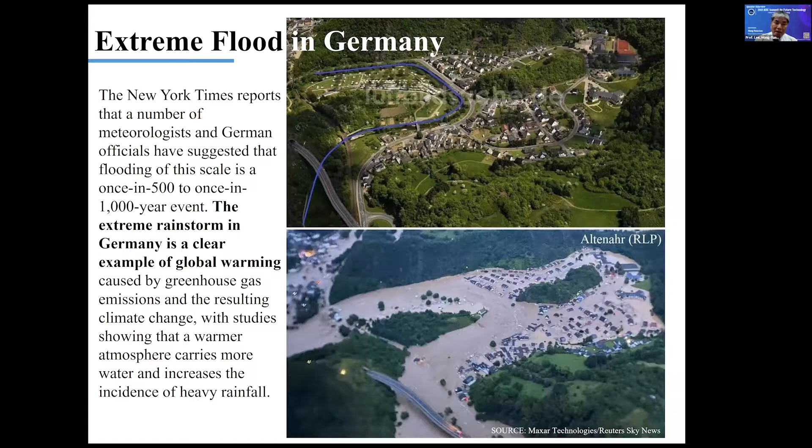Just last week or two, we had extreme flooding in Europe, what we call a 1,000-year event. And this is Germany. And this is China, a 2,000-year event. So extreme weather conditions have become normal.

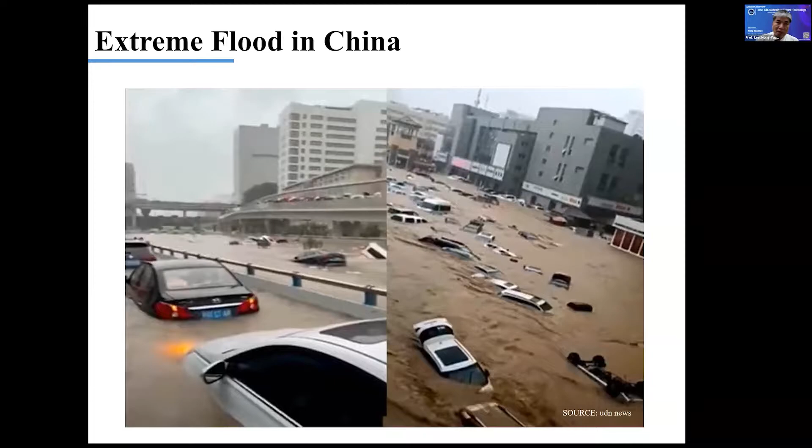What should we do? In Taiwan, we're supposed to have 4.5 typhoons every year, but last year we had none. So we had a very severe drought problem just two months ago, then after one week, a very severe flood problem. This is the situation we now face.

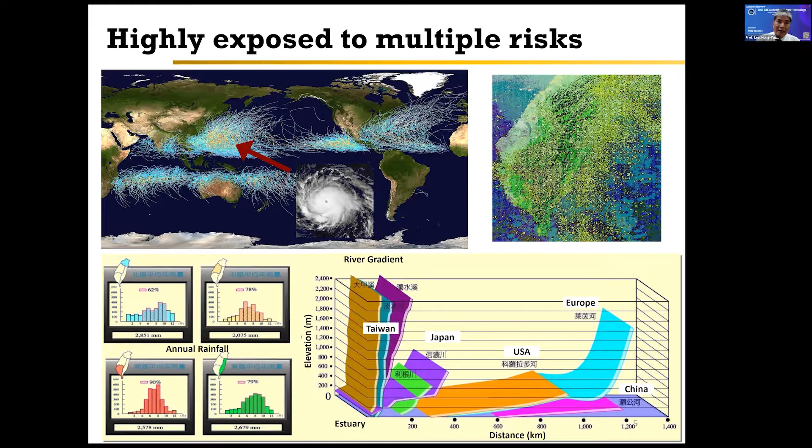According to our analysis, in the past every 19 years we'd have a severe flood; now it's every 7 years. In the past, every 17 years we'd have a severe drought; now every 9 years. So it's either flood or drought, nothing in between.

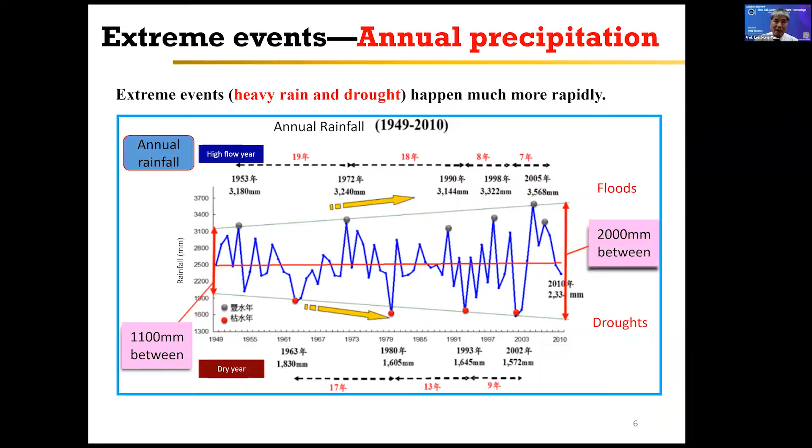In the past, we believed human beings could conquer nature, so we established a very big system called the Taipei Flood Defense System. It was finished during my term as Commissioner of the Water Resource Agency in 1997. We protect the whole of Taipei with a very high dike, hundreds of pumping stations, and hundreds of water gates.

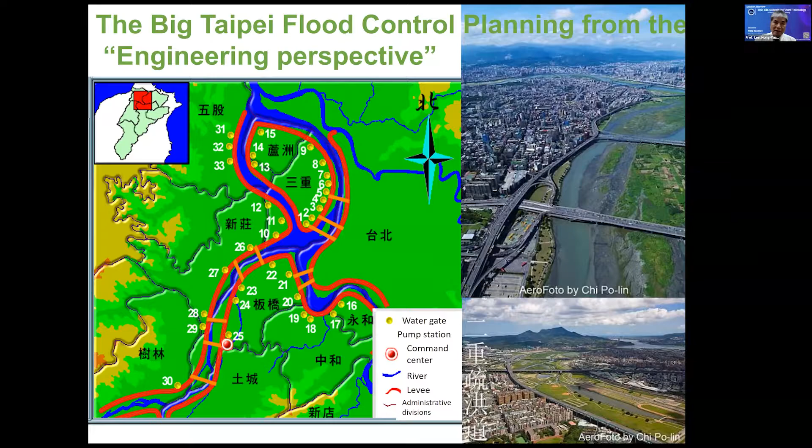And we have the most accurate warning system. In the Tamsui River, six hours ahead, we know exactly the water level, speed, velocity, and discharge. We use this big data to control the whole flood management system.

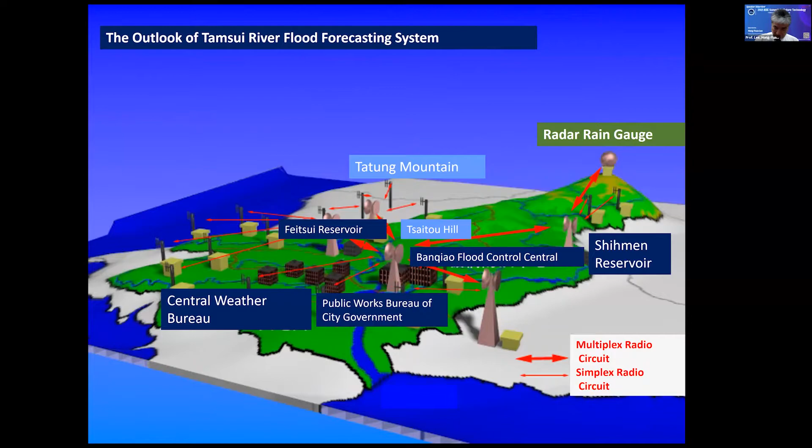But we spent about 300 billion NT, almost 10 billion US dollars — a lot of money back in 1997. Still, I cannot guarantee Taipei won't flood. If we have a 2,000-year flood event, Taipei will still get flooded.

But you cannot say that engineers 40 years ago were wrong. 40 years ago, we believed we could conquer nature, and we could never have dreamed there would be rainfall over 2,000 millimeters.

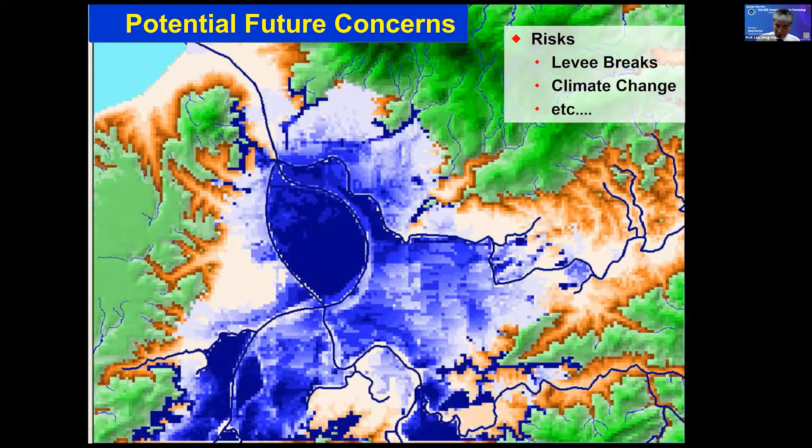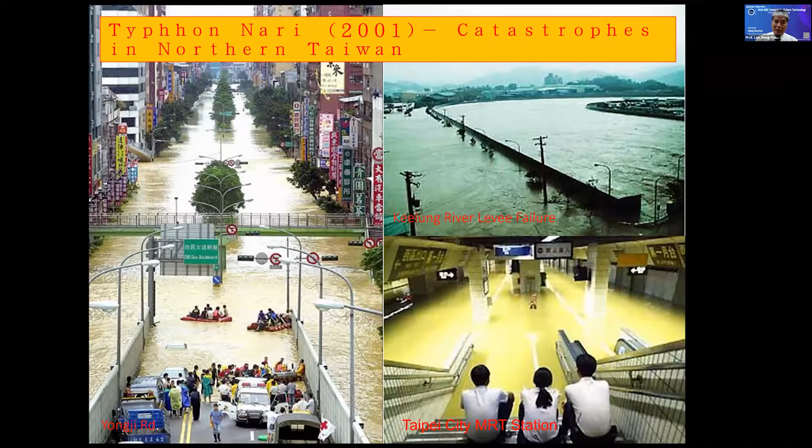So what if I were Minister at that time? I would use urban design measures to solve the flood problem. Taipei got flooded in 2001, but I cannot guarantee this situation won't happen again, because we've spent a lot of money trying to keep the flood away. I'm trying to say we're using land use planning to solve the flood problem.

Actually, we're talking about a paradigm shift. Land reform essentially builds upon the changing of traditional living patterns and values. We have changed our living pattern, redesigned our city, and we now have different values for our lives.

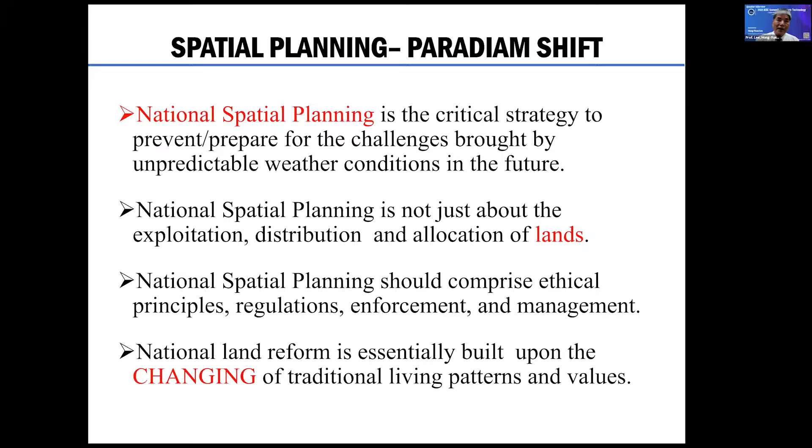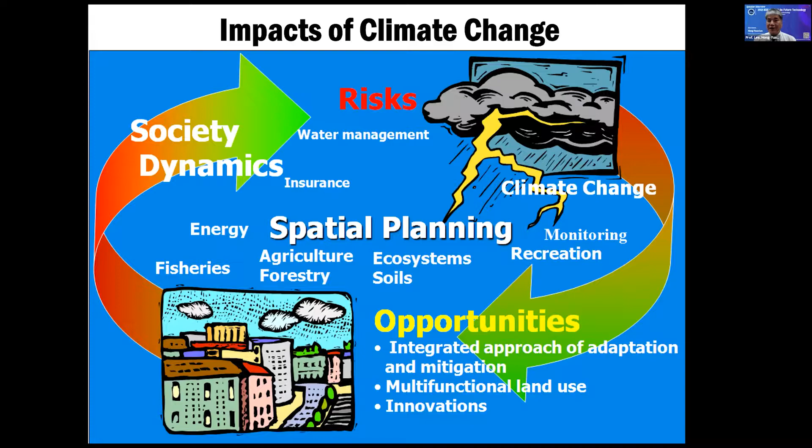So we talk about spatial planning — energy, fishery, agriculture, ecosystem, everything. We have risk in water management, and we actually need insurance. It's the largest crisis for human beings, but also somehow the largest opportunity. This opportunity requires an integrated approach for adaptation and mitigation, multifunctional land use, and most importantly, innovation.

So we are now trying to think, what's the right population for Taipei? In 1945, only 1 million people lived in Taipei, but now almost 8 million people live there. If you have 8 million people in such a crowded area, can you really believe engineers can solve the flood problem or the drought problem naturally? It's not possible.

So we are now very seriously considering reallocating our capital from Taipei to Taichung. By doing that, 3 million people would leave Taipei, and hopefully our people and industry would be more evenly distributed across our land. We are working on that now.

Actually, to do that, we have to calculate the carrying capacity of our land, based on environmental limits, land resource availability, water resource availability, public resource availability, and we have to predict our population and demand. We are now working on it.

That means we want smart use of our land. When I used to be Minister of the Interior, we established a huge cloud system — all the data related to spatial planning is now on our website. You are welcome to visit it.

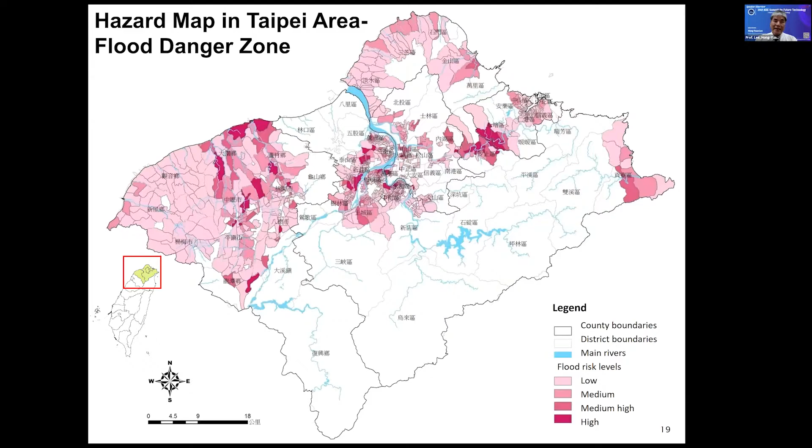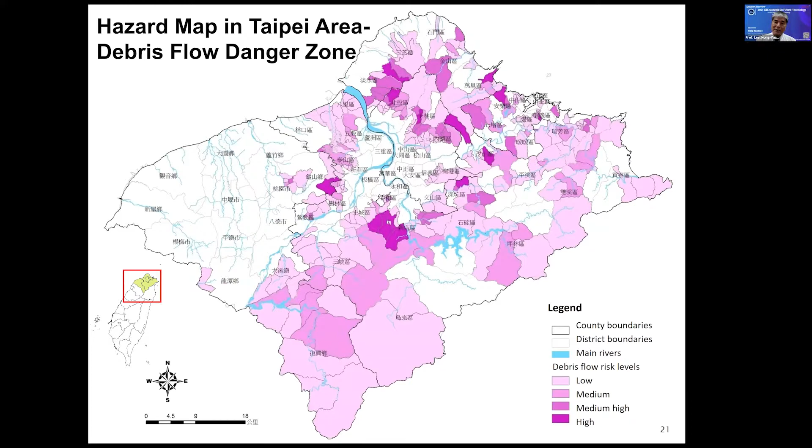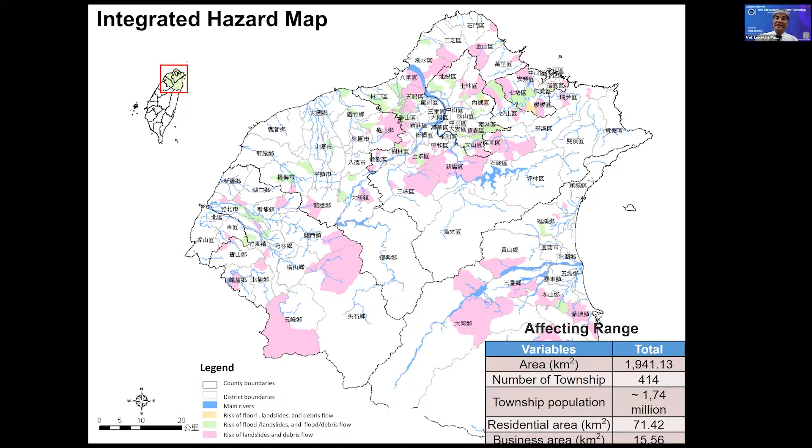This map was done in 2013. We forwarded the map to the local city and county governments and asked them to redesign the city and the county. So in the future, land use in Taiwan is based on the different risk levels of disaster.

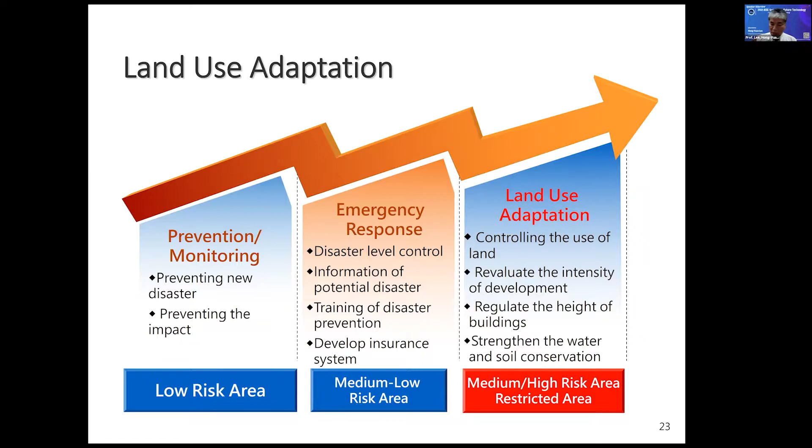For the low risk area, we work on prevention and monitoring. In the medium-low risk area, it's about emergency response, making sure no matter what happens, you are safe. In the high risk area, we try to change the land use and reallocate the people and infrastructure. We want to solve the city flood problem using a non-engineering way.

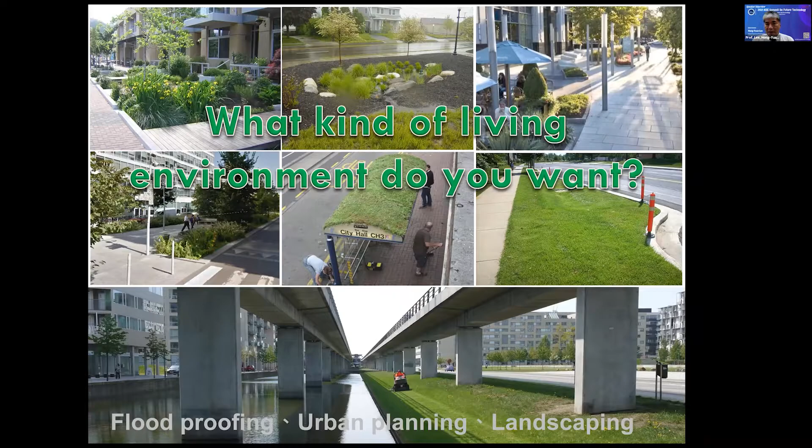So what kind of living environment do we want? Flood-proofing, urban planning, and landscaping all have to work together.

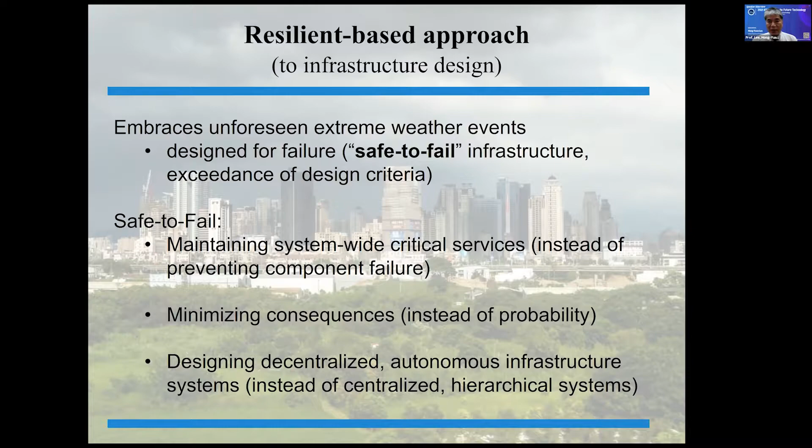We are talking about the resilience approach, which is very different from our traditional way of thinking. There's a good terminology: design for failure. From cases in Europe and China, we can guarantee there's no such thing as safe design, especially under extreme weather conditions. So we have to redesign the city and the town so that when it's over the protection criteria, the major function of the city still keeps working.

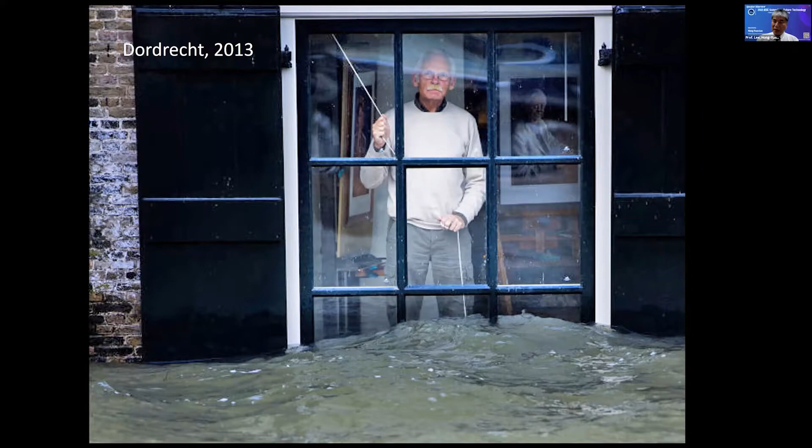This case is a city called Dordrecht in Rotterdam, in the Netherlands. You can see the water is over the window, and this gentleman doesn't have to be relocated, because we call it design for failure. We want to enhance the resilience of the city.

A lot of people, especially the IT and AI people, say we have a very smart city. But what if you get flooded? It's not smart at all. In the case of Zhengzhou, China, the Chinese used to be so proud that they don't have to use cash, everybody runs everything by mobile. But if the city gets flooded, those smart things won't work anymore.

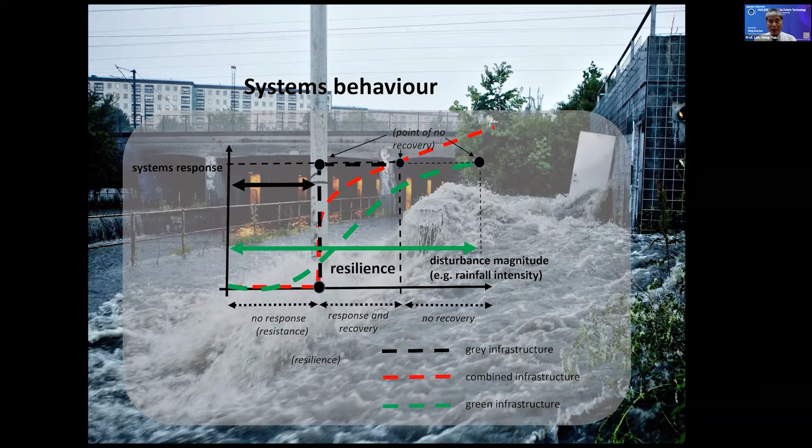So we say we try to increase the resilience of the city. It's a system behavior, not just one function, not just grey infrastructure. We are talking about needing green infrastructure too. From blue and green infrastructure, we actually increase the ability to serve and protect against flood.

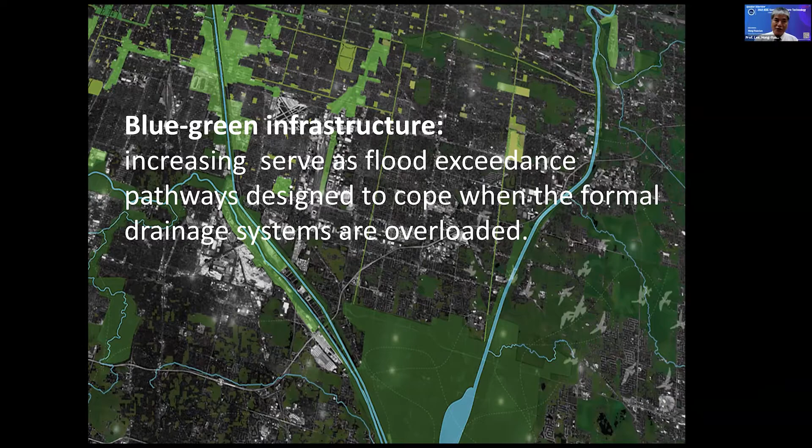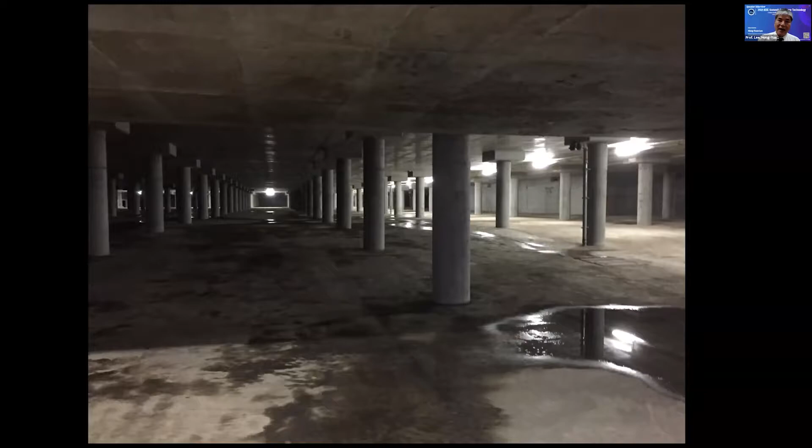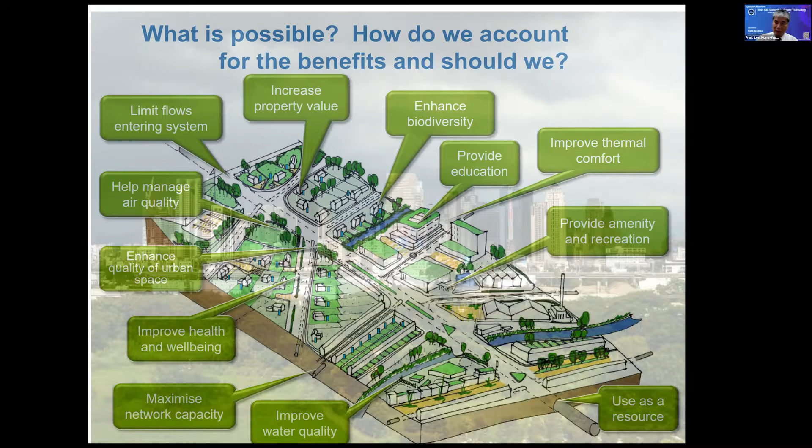The whole city has different functions which we have to redesign. There are so many disciplines involved. We improve water quality, maximize network capacity, improve health and wellbeing, and enhance the quality of urban space. We have to work together as a team from different government agencies and different disciplines.

So from little rain to design rain to extreme rain, we have different concepts, different methodology, different measures to try to improve the resilience of the city.

In the past, the land was not developed, so when we built a city, the water was supposed to penetrate into the ground. Now it becomes runoff. When I used to be the Minister of the Interior, I changed the law. The developer can develop the land from left-hand side to right-hand side, yes, they can do that, but they have to make sure not a single drop of water more can be released from the project.

We call it low impact development. You cannot stop development, but you make sure when you develop, the impact is limited, according to the law. There are so many different facilities in this local low impact development, and those elements have to combine with the landscape and the design of the city.

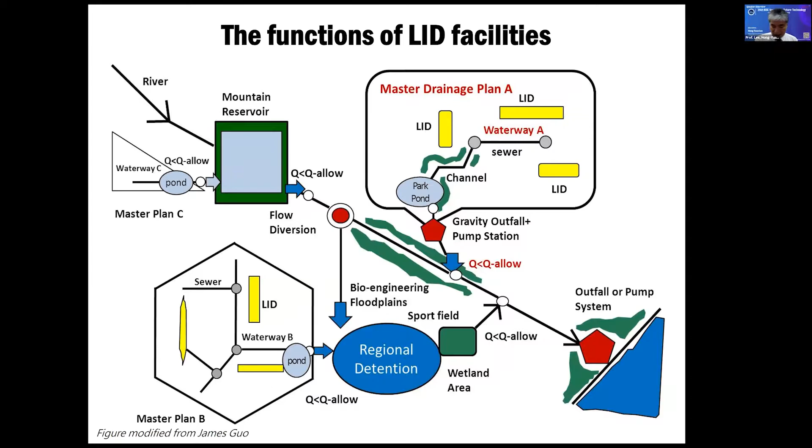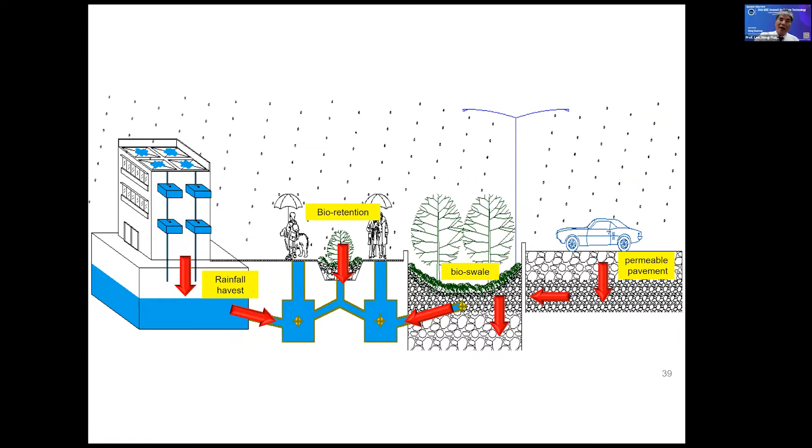Two of my students' PhD theses and five master's theses looked at how to design a city. In China, they call it the Sponge City, where water can penetrate underground and connect to the existing drainage systems.

In the past, as the city became bigger and bigger, the government was busy building the drainage system, which became bigger and bigger. But the flood problem can never be solved that way.

My idea is that the small part is actually a low-lying park, constructed wetland, detention basin, and from the small system to the medium system to the larger system, using urban design measures to solve the flood problem.

It's very easy to say, very difficult to implement, because in the central government, 3 ministries are involved. In the city government, 5 departments are involved. In the university, 3 disciplines are involved.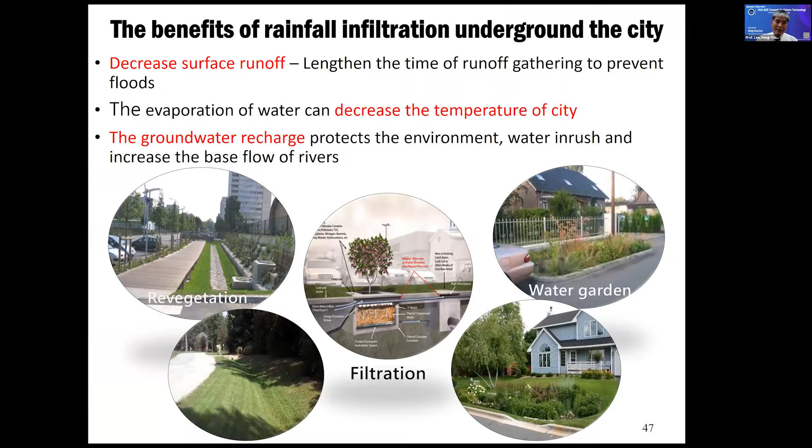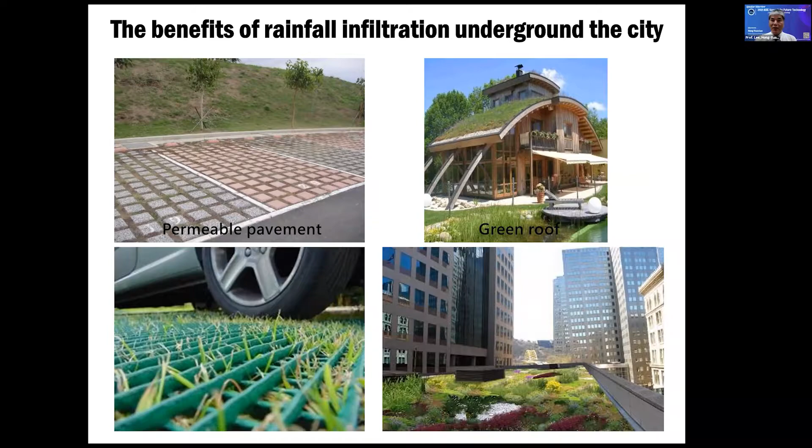And the future of the city will look like that. It's probably very common in the United States and Europe, but not that common in Asia. So we make the city become beautiful. We make sure all the water is permeable and can enter the underground. We have a green roof and all kinds of facilities, and hopefully we can solve the flood problem.

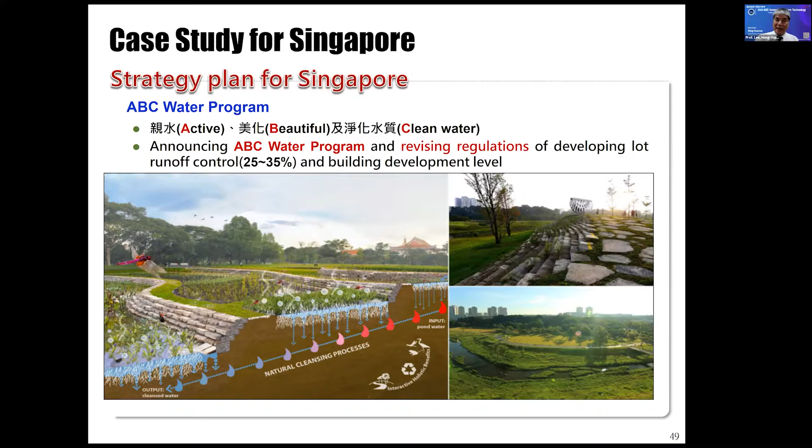Actually, Singapore has a strategic planning approach that turned out very successful. And Stockholm, we call it the green capital of Europe. So when we talk about low impact development, we're talking about storm management, water resources management, and creating environment. Most politicians want to know that by doing this, we solve the flood problem, improve the living environment, and also increase the price of the land.

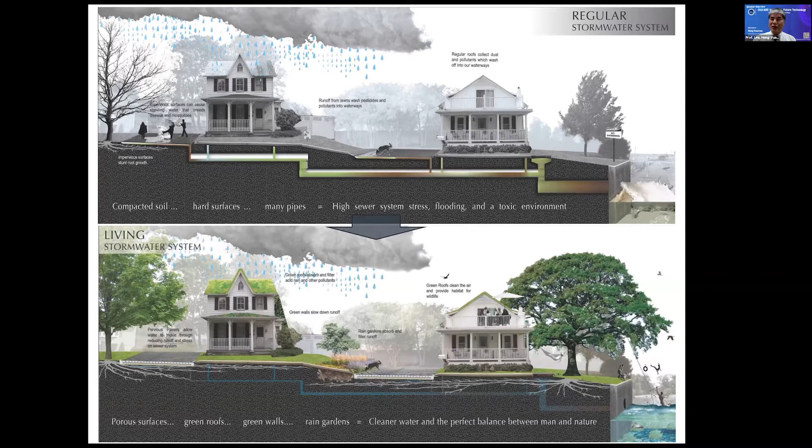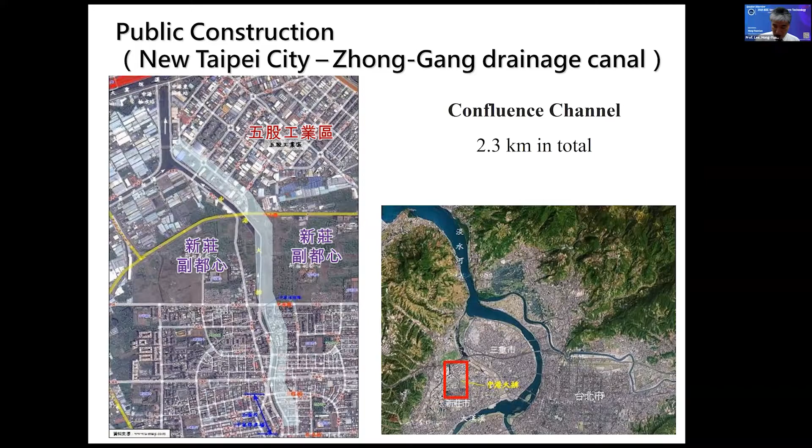We have several cases in Taiwan from when I used to be the vice mayor of New Taipei City. This case is a very polluted canal in the township called Xinzhuang, a city of about 500,000 people. All the sewage came to this canal. It became so polluted, the smell was so bad, and it got flooded very easily.

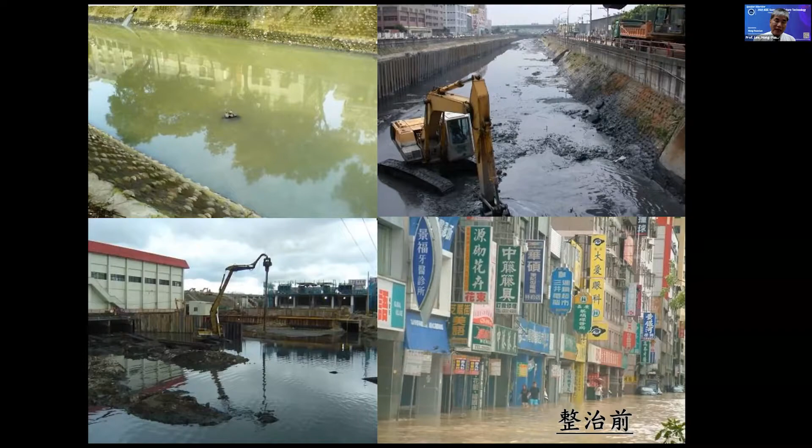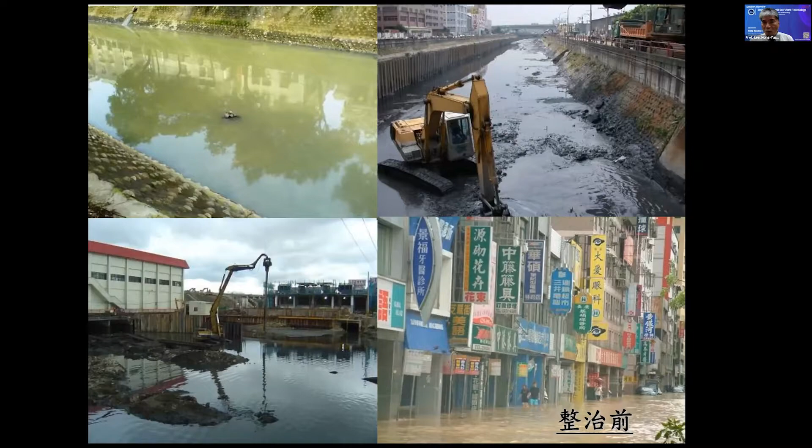So when I became vice mayor, on the very first day I asked 5 director generals to come to my office - from transportation, water resources, environmental, urban planning, and economic development. I told them this polluted water has to become clean water, a clean canal, within 4 years. Why 4 years? Because the term of the mayor in Taiwan is 4 years. We have to make sure that when the mayor finishes the term, the project is there.

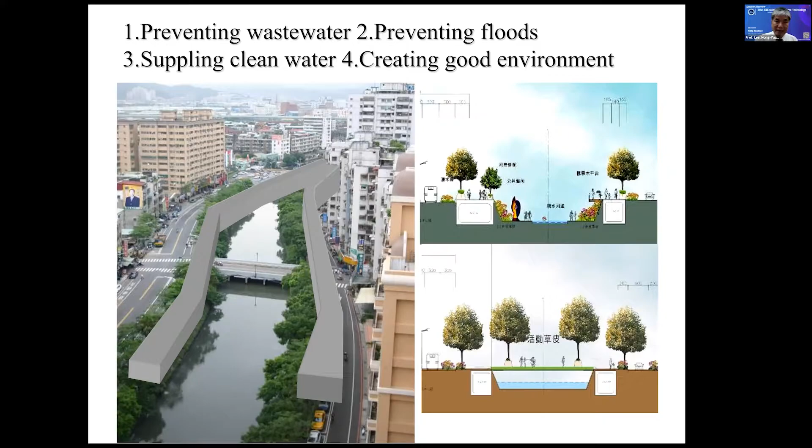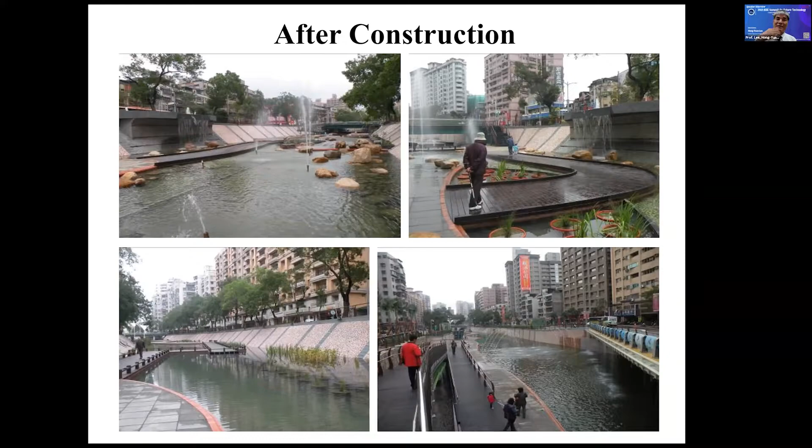Actually, it's quite simple. We just built a box cover to intercept the sewage and transfer it into a concentrated wastewater treatment plant nearby, treat it, and put it back. So it's as simple as that. It used to look like this, now it looks like this. Water is clean - actually that water is recycled water. You don't have to spend a lot of money, and it's done like that.

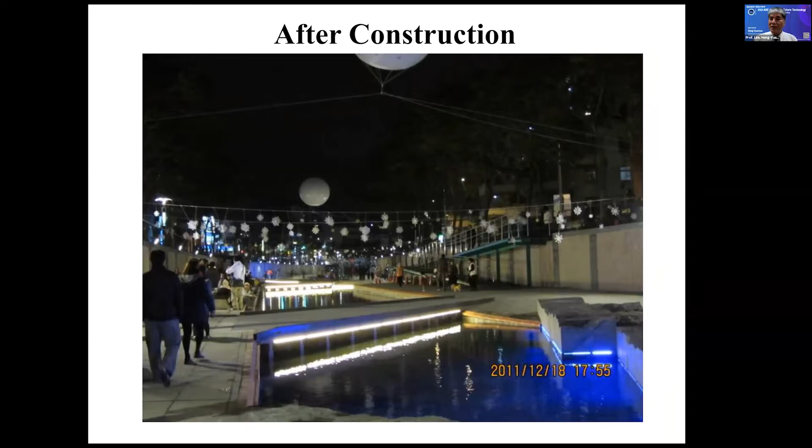We spent 2.3 billion NT - the government invested 2.3 billion NT. But after that, the land price doubled and the house price tripled. We created a lot of revenue.

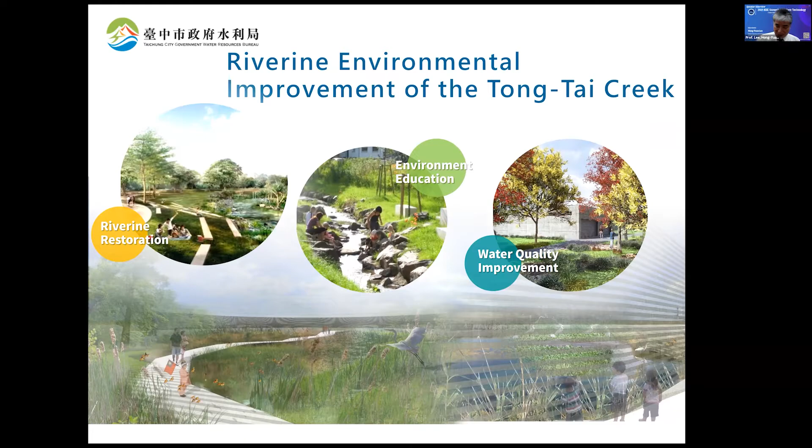There's another project we just finished in the city of Taichung. The mayor invited me to Taichung to see a very polluted river there. After that, they invited me to Tunghai University, where there was very polluted water nearby the campus. I went to visit the site and asked Tunghai University if I could use part of their land. Then I established what we call a Pebble treatment plant underground.

I used the biofilm of the pebbles, which let me remove 80%, even 85%, of the contaminant. So we started discussing the project and signed an MOU between the city of Taichung and Tunghai University. After 2 years, last year, the project was done.

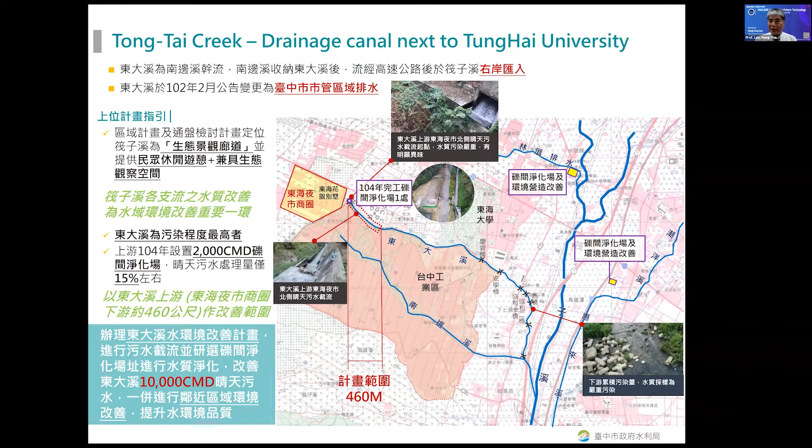Most importantly, when we work on a project, I use a process we call participatory decision-making. We make sure all the relevant departments of the university, the students, and professors work together and discuss. We invite all the NGOs, NPOs, and even elementary and middle schools - everybody talks and contributes their own design.

Just by doing that, we changed the culture of operation at the city of Taichung. We let Tunghai University's different departments, across disciplines, talk to each other. So now the project is done.

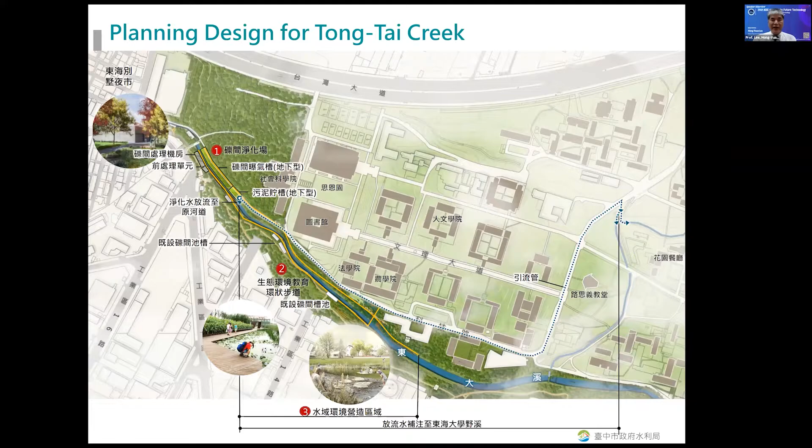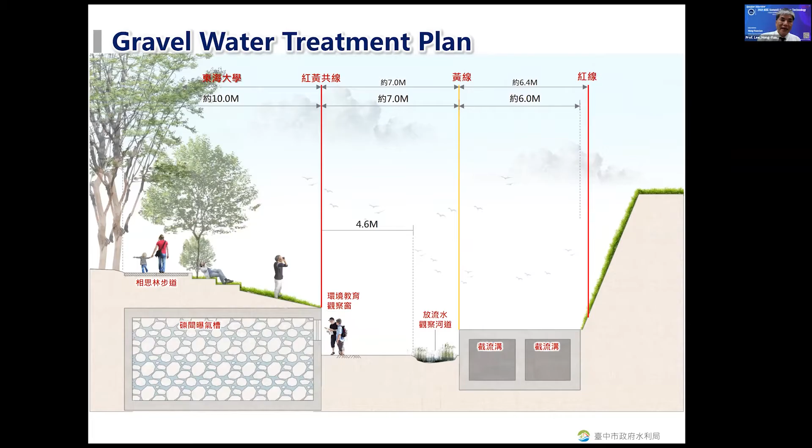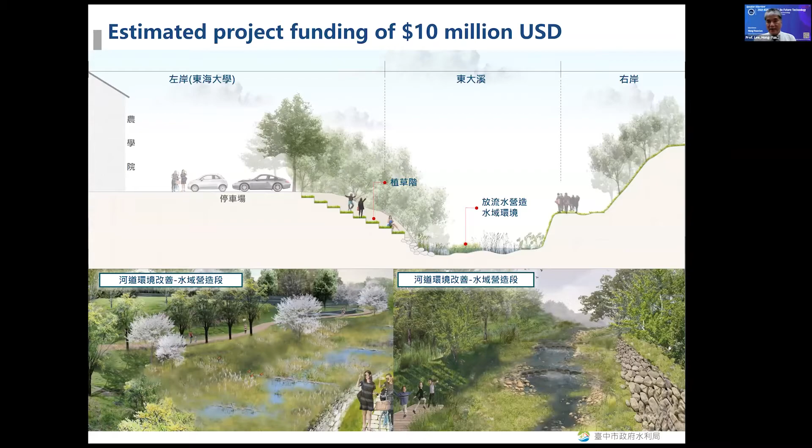We treat the water using a very environmentally friendly way. See, the left-hand side is our wastewater treatment plant, and on top of it, you cannot even see it. This is before, and this is after - it's already done. Two years, and the project is complete. I think everybody's very happy.

Most importantly, I had the cleaned-up water flow into the campus of Tunghai University. I created a canal to make the campus beautiful. When the treated, clean water enters the original Tong-Tai Creek, I put in a very small turbine so I can generate what we call green electricity, small hydropower. By doing that, I can generate green energy.

Then I can have a green energy certificate. I have already signed a contract with Delta Electronics in Taiwan, and they want to buy the green certificate, with that money returned to Tunghai University.

So that they can use it to maintain this facility, and use the money for their environmental education. By doing that, they told me that Tunghai University is totally changed, so that students enjoy this activity very much.

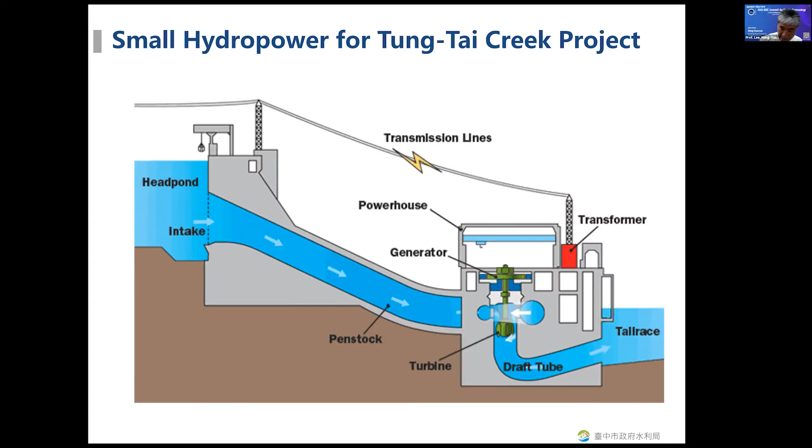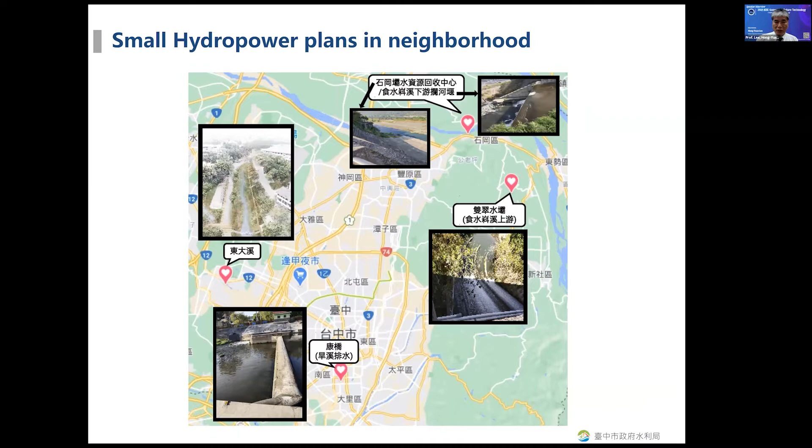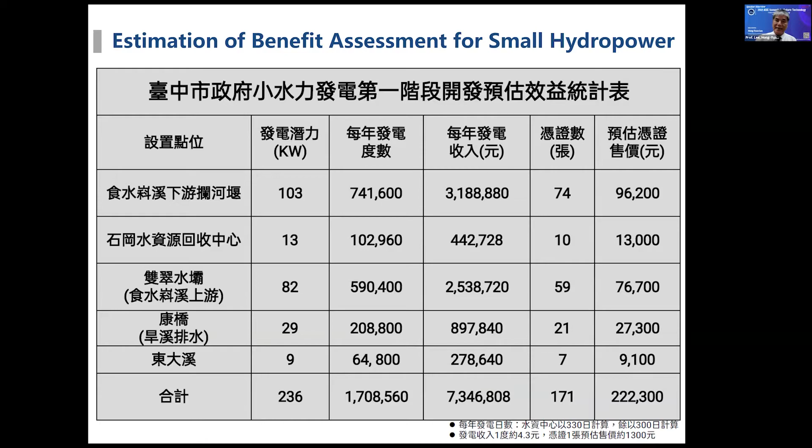I asked the city of Taichung to really look into their drainage system and irrigation system, to find out all the potential sites for small water power. So hopefully, next year or two years from now, they can generate a lot of electricity and green energy certificates. This is a very good environmentally friendly thing, and it promotes the policy of the government.

So in conclusion, when we come to global climate change, we always tend to discuss technical problems. But I always ask myself, or talk to my colleagues, can the Water Resources Agency really solve the problem in Taiwan? Actually, it's not possible, because there are so many ministries and so many different disciplines involved.

Also, for the government, the most difficult or challenging task is how to make decisions under uncertainty. Nobody knows how many typhoons we are going to have. Nobody knows if we are going to have a so-called 1,000-year flood event. But we have to make sure the cities are safe, the infrastructure is there, and everybody is safe. So we need flexibility.

But actually, flexibility doesn't exist in our government operations in Taiwan, in China, in the United States. So I try to promote what we call interdisciplinary dialogue.

Especially for university professors and students, we make sure we educate our students with interdisciplinary training, so they are well prepared that when they leave the university, they can face their job, their challenge, and their career. Also, most importantly, is interagency coordination.

Make sense? Actually, that's why I keep promoting so-called participatory decision making. For example, for those two projects, I myself, as a vice mayor, spent 100 hours talking to the people, inspiring people, and then people can feel the government is working. And then the mayor becomes very popular, so they smell the taste of popularity, and then he would like to put money into this kind of activity. We try to create a win-win situation. Okay, thank you.